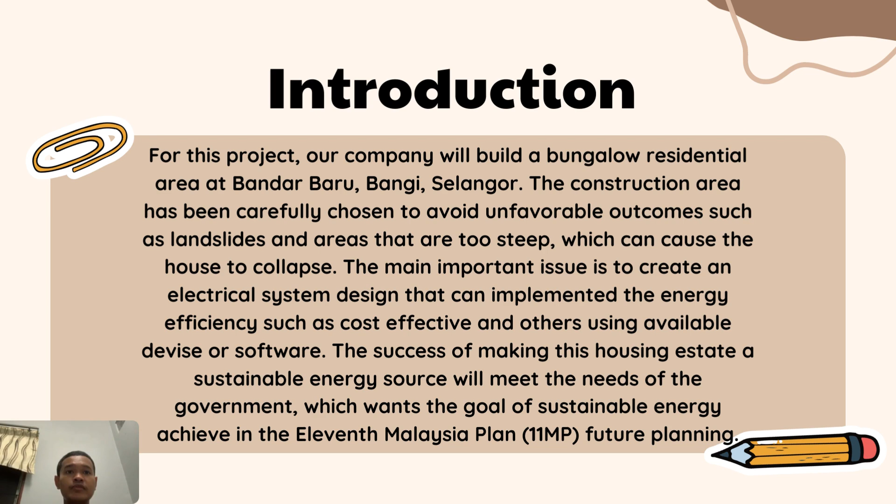The main important issue is to create an electrical system design that can implement energy efficiency, such as cost-effectiveness and others, using available devices or software. The success of making this housing estate a sustainable energy source will meet the needs of the government, which wants the goal of sustainable energy achieved in the 11th Malaysia Plan, future planning.

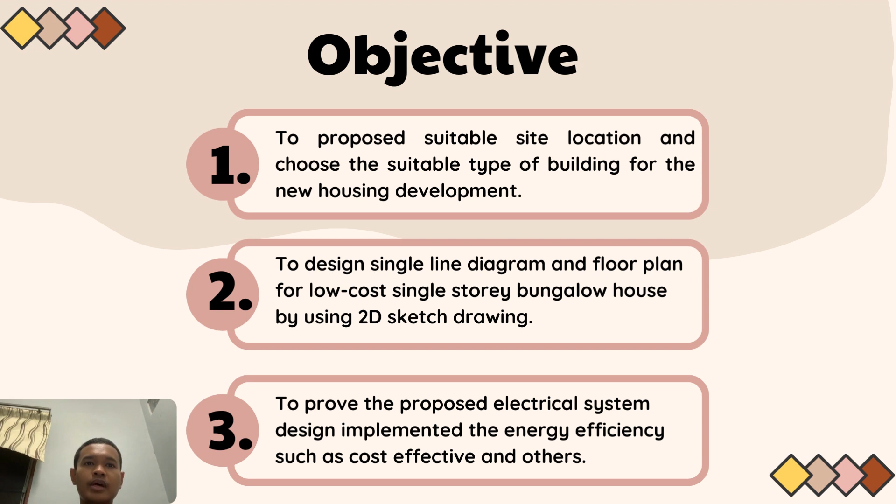Okay, for the scope of this project, the first one is the design is a single-story bungalow residential house. The second one is maximum demand, costing and other related calculations are based on the proposed design of the single-story bungalow house. And the last one of this scope is the engineering innovation proposed and applied is done to minimize energy consumption. I think that's all for me.

We move to our other members.

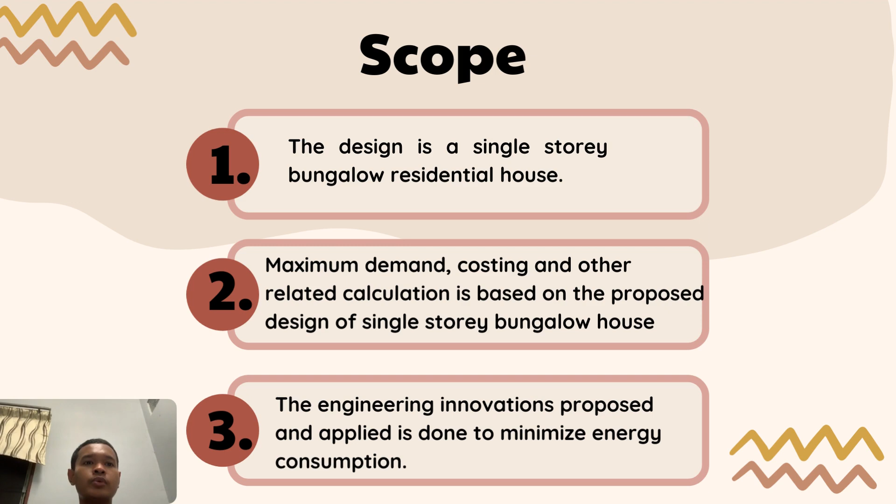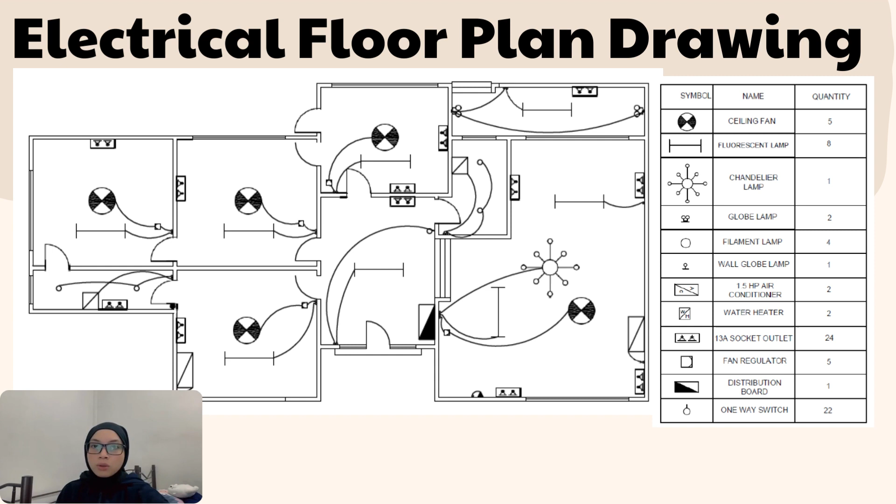And globe lamps, we put 2. Filament lamps, we put 4. Wall globe lamp, we put 1 only. And 1.5 horsepower air conditioners, we put 2, which are at the living room and master bedroom. Water heaters, we put 2, located at both toilets. And the huge part of this drawing is the 13 ampere socket outlet, which we put 24 of. And fan regulators, we put 5. The distribution board, we put 1 at the entrance of the house. And finally, we put 22 one-way switches.

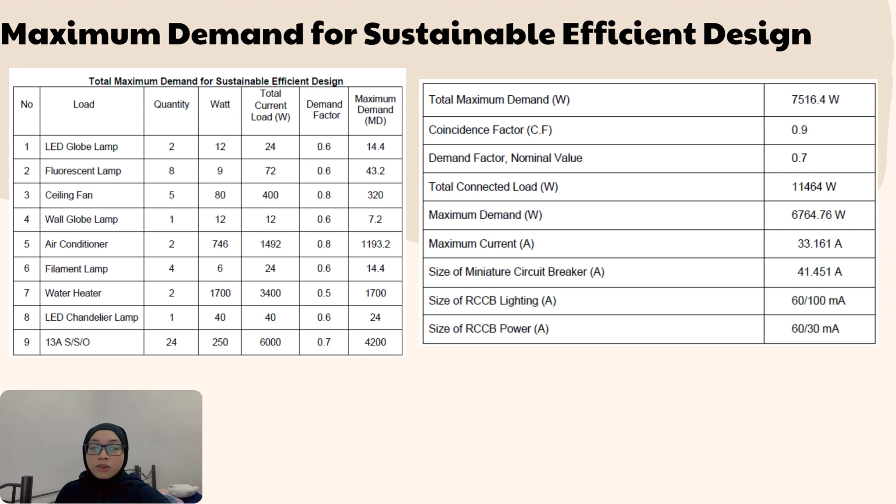So in this slide, I will continue about the calculation for maximum demand for sustainable efficient design. So from the past slide, we get our total maximum demand, which is 7,516.4. From the total maximum demand, we will get our maximum demand by multiplying it by the coincidence factor. Our coincidence factor is 0.9. So after multiplying the total maximum demand by the coincidence factor, we get our maximum demand, which is 6,764.76 watts. Then from the maximum demand, we divide it by 240 times 0.85, and we get our maximum current, which is 33.161 amperes.

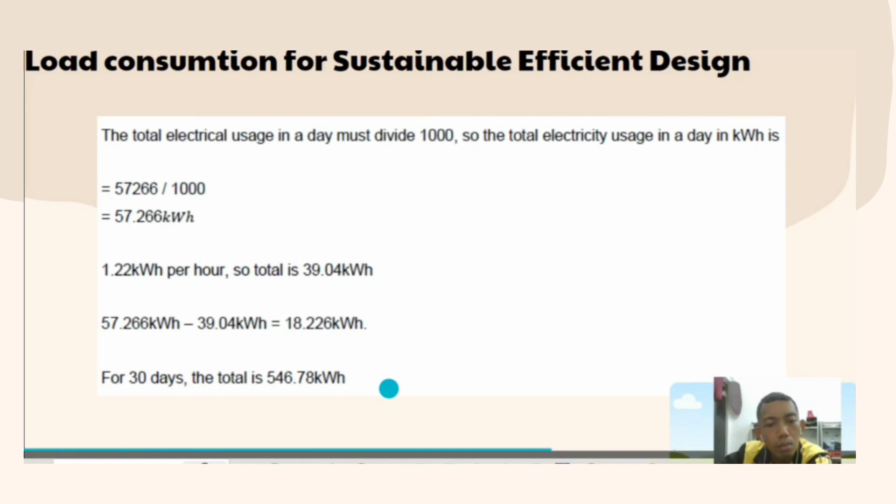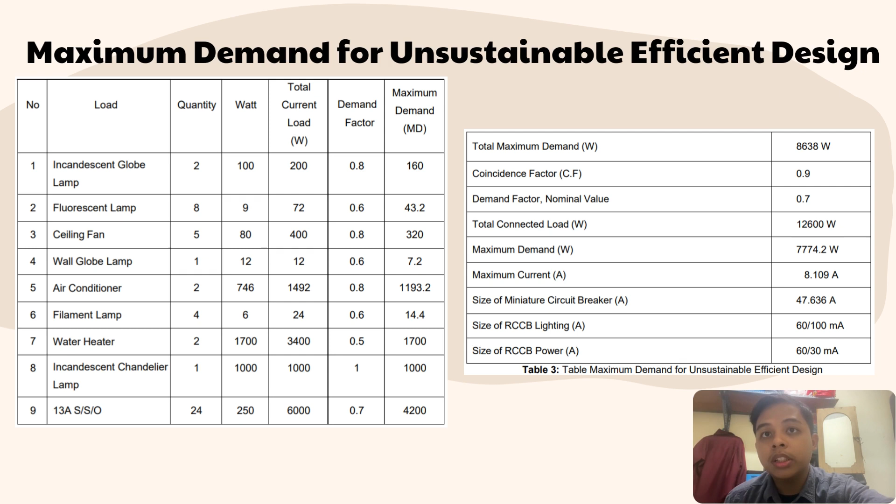Today I will present about the maximum demand for unsustainable design. For example, we can see incandescent globe lamp and incandescent chandelier lamp is unsustainable design. The unsustainable design choices can lead to higher operation cost over time, and inefficient buildings may require more energy for heating and cooling, resulting in increased energy bills.

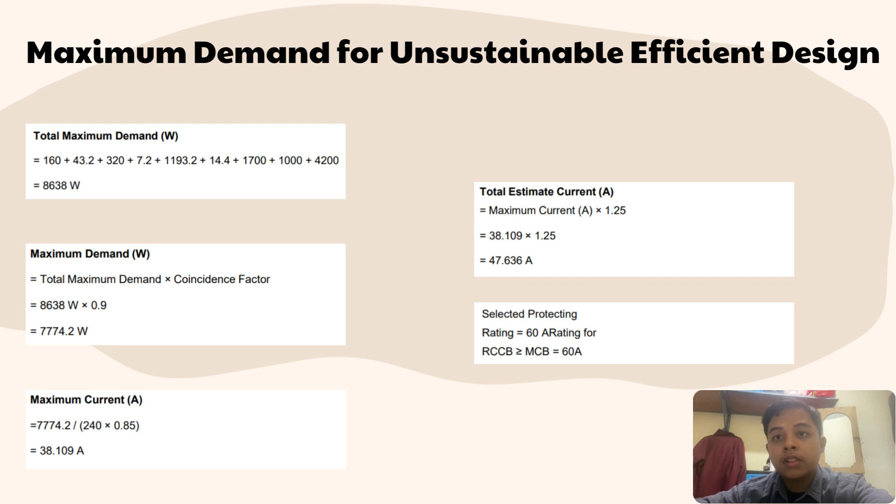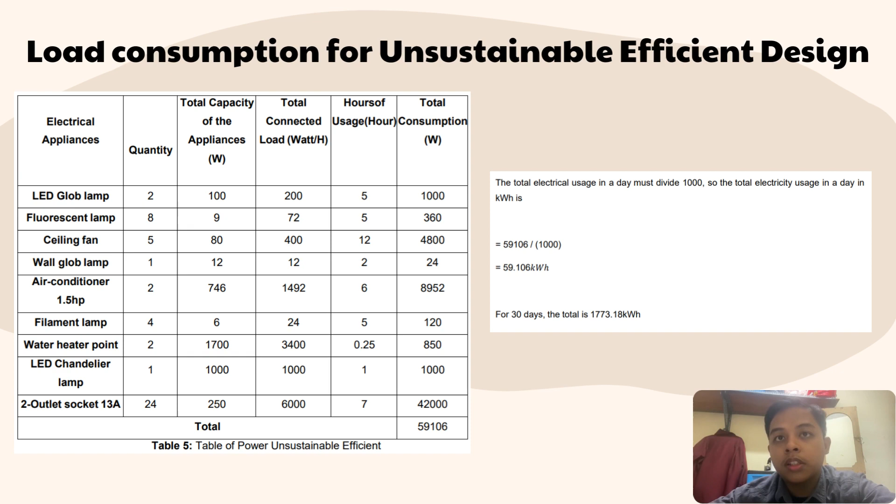Next, for the cost estimation, we need to calculate because the rating is different. For first 200 kilowatt, next for 100 kilowatt, and next for 300 kilowatt per month. Then the total we must pay is 1262.3.

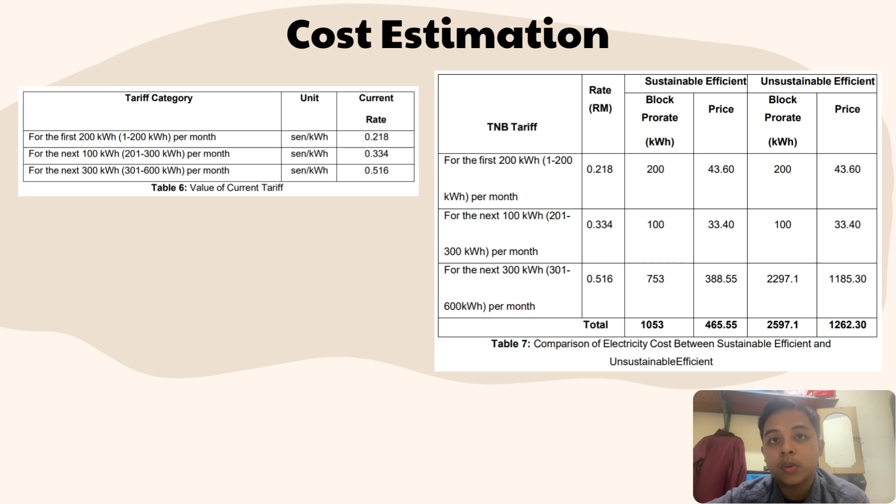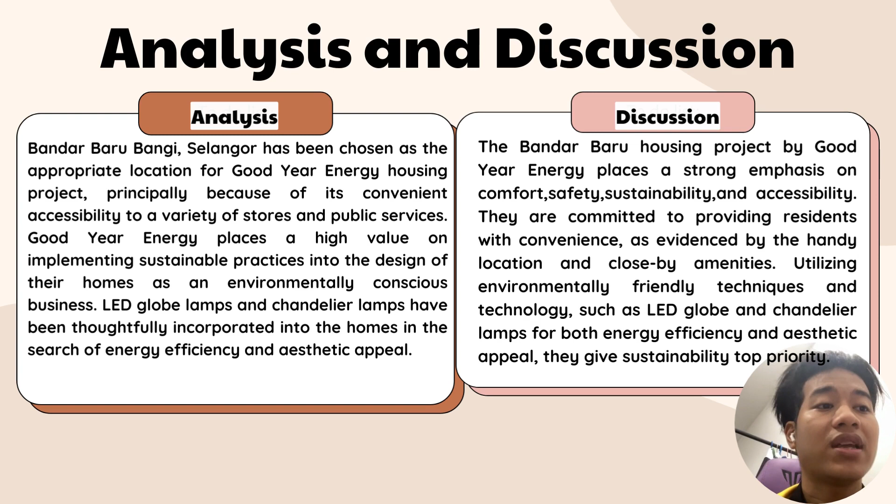and aesthetic appeal. So for our discussion, the Bandar Baru housing project by Good Year Energy places a strong emphasis on comfort, safety, sustainability, and accessibility. They are committed to providing residents with convenience, as evident by the handy location and close-by amenities. Utilizing environmentally friendly techniques and technology, such as LED globe and chandelier lamps, for both energy efficiency and aesthetic appeal, they give sustainability top priority.

In conclusion, Good Year Energy has proposed Bangi, Selangor as a potential location for the plant. In the neighborhood, there are a lot of shops as well as public services. Additionally, the business chooses a construction style that is suitable for the creation of the new neighborhood. The organization selected a location that is friendly to the surrounding environment and appealing to those who value tranquility.

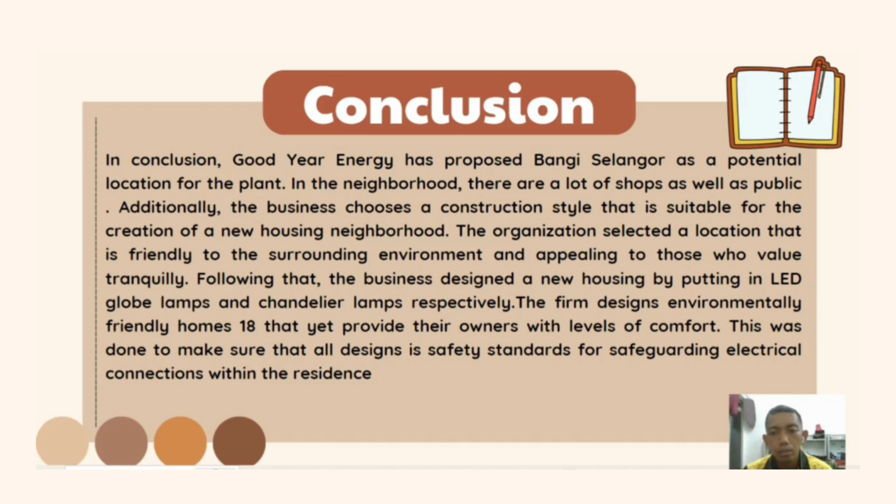Following that, the business designed new housing by putting in LED globe lamps and chandelier lamps respectively. The firm designed environmentally friendly homes that yet provide their owners with a level of comfort. As we can see, this conclusion is about the standard for designing housing, and to make sure it's safe to use. Okay, that's all for me.